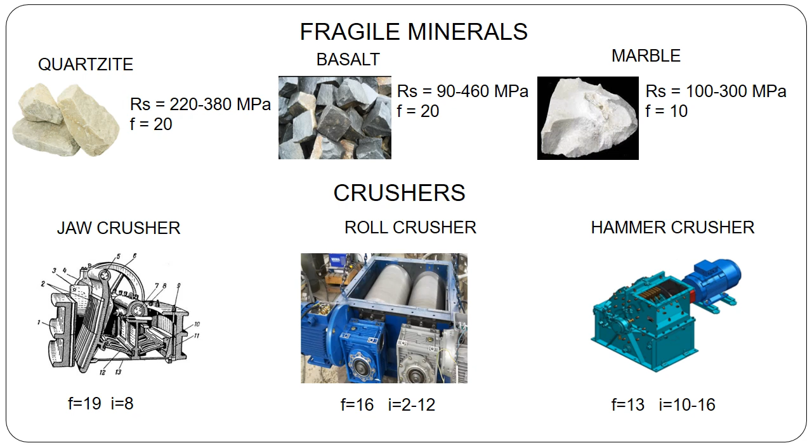The standard for determining the effectiveness of the use of crushing and grinding equipment is glass, which has high compressive strength and low impact resistance, which is destroyed by mechanical action without noticeable plastic deformation and belongs to ideally brittle materials along with diamond and quartz of all types of glass.

Glass containers with standardized mechanical properties and geometric dimensions are accepted as the starting material. At the same time, interest in obtaining glass powder is currently growing in the world. This problem is relevant, as it is associated with a wide range of properties that make simple and special glass powders a universal material.

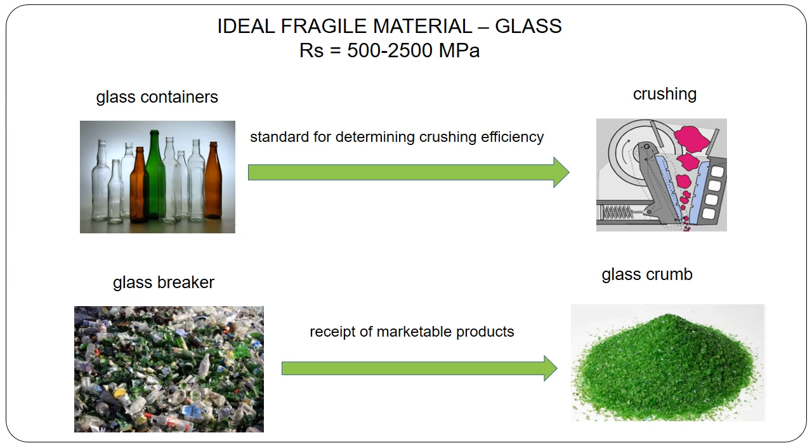Powder production is a complex and energy-intensive process, which includes all stages of glass production. The raw materials for glass production are quartz low iron sands, soda ash, limestone, dolomite and others that require preliminary enrichment, washing, drying, grinding. The resulting glass mass is again subjected to crushing, grinding, separation, which creates a high cost of production.

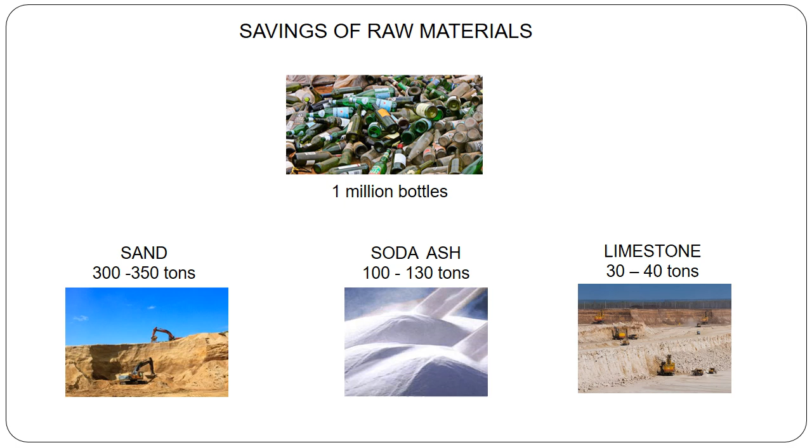At the same time, hundreds of thousands of tons of glass waste are generated annually, but only an insignificant part of them passes into secondary resources. Recycling glass allows you to save raw materials and save huge areas of land, which otherwise would turn into environmentally hazardous landfills. Based on this, the problem of assessing the effectiveness of using vibratory jaw crushers for processing glass waste to obtain glass crumb is also considered.

Depending on the composition, glass chips and powders can meet a variety of requirements and be used as additives in the production of fiberglass, foam glass, glass concrete and other materials.

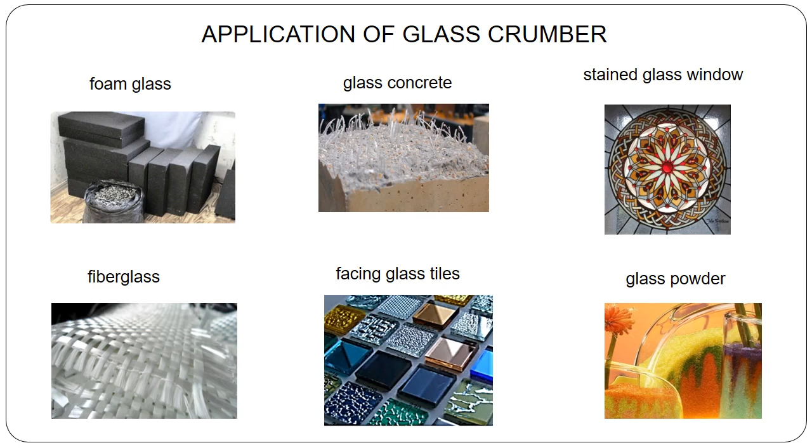A physical picture of the destruction of the material by a single impact, and the main dynamic characteristics of the crusher were determined on the developed laboratory installation with a horizontal pendulum impact tester. The installation includes a pendulum, at the free end of which there is a shock assembly.

The fastening of the impactor allows you to set a different profile of the working surface that interacts with the glass. The height of lifting and dropping of the impactor is determined by the measuring system, the signal from which passes through the vibration measuring equipment VI-6 and the USB oscilloscope, and registers the height of the dropping of the load on the laptop screen.

This system also makes it possible to trace the nature of the interaction of the impactor with the material under study. For the same purpose, an acceleration sensor is attached to the shock assembly, which records changes in acceleration in the vertical plane.

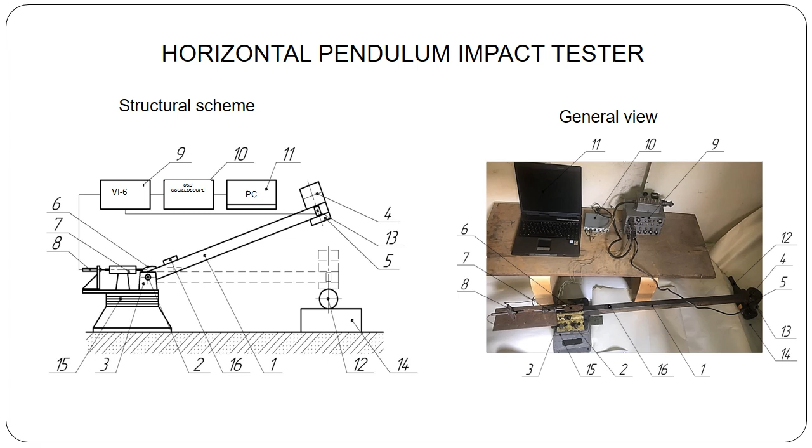The initial application of the load was simulated with a different method of feeding a bottle into an inclined crushing chamber of a vibratory jaw crusher. As an example, the results of a single impact of a flat striker on bottles for sparkling wines are given. The mass of the impactor is 5 kilograms. The drop height is 0.7 meters. When a bottle is fed into the crushing chamber with the bottom towards the discharge window, the bottle is destroyed by a single blow.

However, more than 50% of glass breakage has convex shapes, which reduce the fill factor of the transport container. When a bottle was fed into the crushing chamber with its neck in the direction of the discharge window, a product with a size of more than 50 millimeters was mainly formed with a crushed neck and a whole bottom.

The bottle can be loaded into the crushing chamber in a position where the longitudinal axes of symmetry of the bottle and the chamber are perpendicular. When exposed to a cylindrical surface by a point load, the neck and bottom are not subjected to destruction, with sufficient destruction of the cylinder. The preferred result is obtained when the surface of the bottle interacts with a distributed load Q.

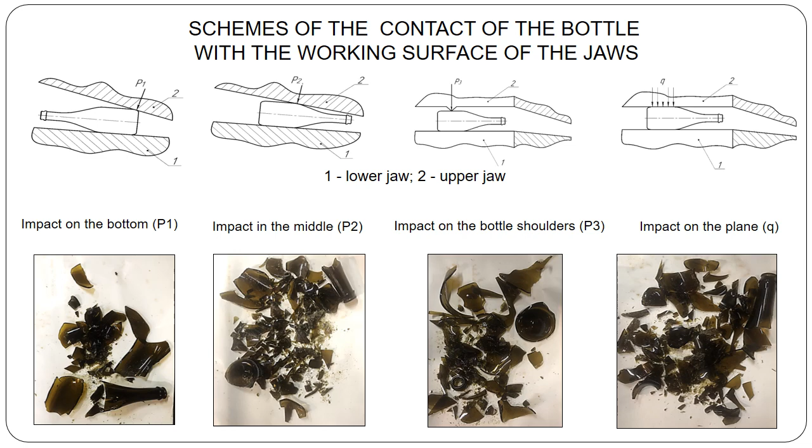Crushing was carried out on bottles with a cylinder diameter of 90 millimeters, identical to those studied on a pendulum impact tester. Since the width of the crushing chamber of the laboratory sample is less than the height of the bottle, it was loaded with the bottom in the direction of the discharge window. At the first contact of the bottle with the working surface of the jaw, the process of destruction of the bottle corresponded to the destruction on the impact tester.

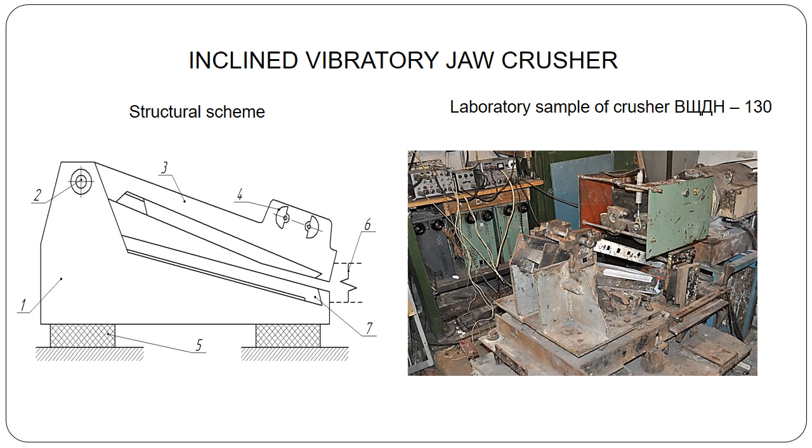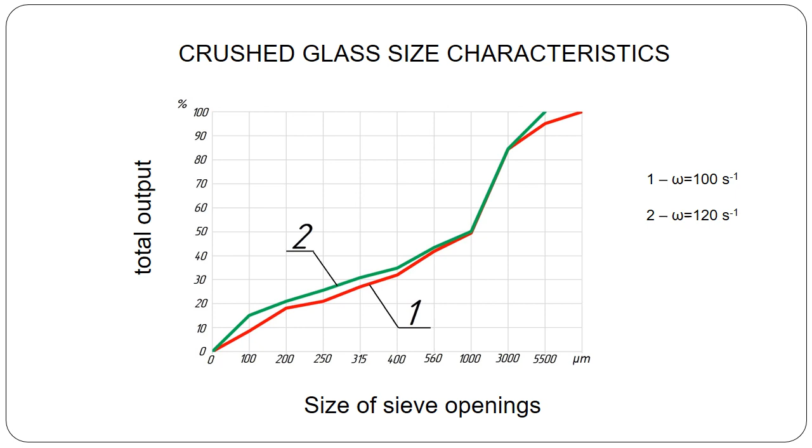A high-quality mass of a flat shape was obtained to fill the transport container. However, a feature of the crusher is the possibility of producing marketable products. Subsequently, the resulting flat material moved in the crushing chamber to the discharge window, receiving a high-frequency impact. The graphical dependence shows 100% of the output used in the production of coarsely ground material, 50% of finely ground and 40% of powder.

All narrow classes of material size, obtained by single crushing of cullets, are used in decorative products. Powders of 100 microns as additives to lubricants. Modifying additives to adhesives. All fractions less than 5 mm are used in various grades of concrete, according to the purpose of the work.

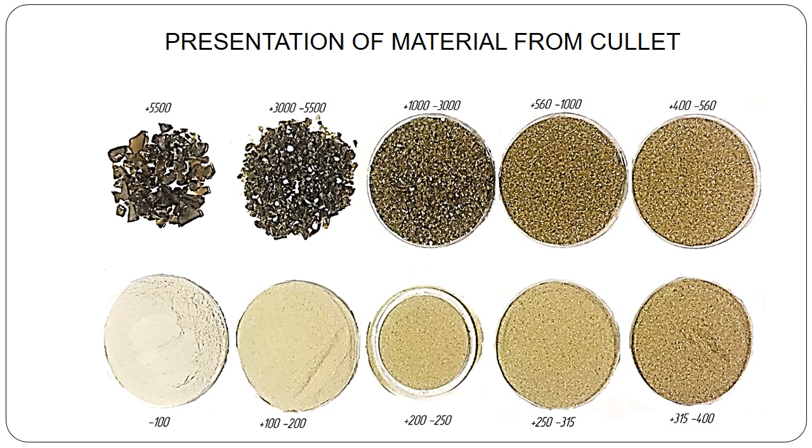The studies carried out on the example of the destruction of glass containers substantiated the efficiency of crushing brittle materials in a vibratory jaw crusher with an inclined crushing chamber. Feeding a cylindrical feedstock with a diameter of 90 mm into the crusher and obtaining a fine-grained product shows the prospects for creating a small-sized vibratory jaw crusher with the implementation of medium fine crushing and grinding in it, which will significantly reduce the number of units in the production process chain, reduce their cost and expand the range of products obtained, fine-grained and powder materials. Thank you for attention.